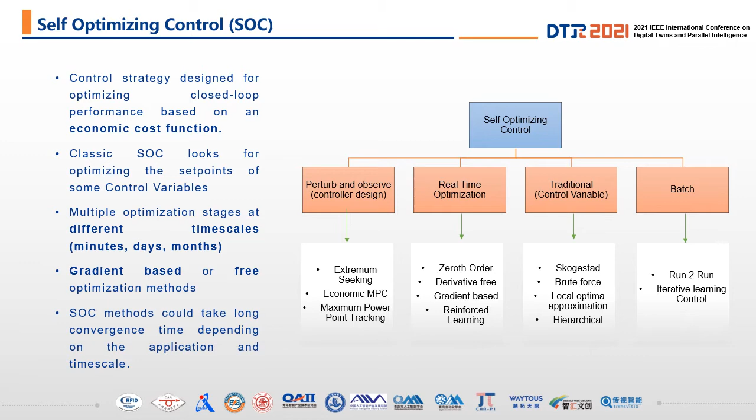So in that sense, if we want to introduce some smartness into the system and combine with this self-optimizing control that indeed requires some modeling of the system, digital twin gives a unique opportunity, considering that the digital twin is a virtual representation of a system. In theory, any system can be virtually represented with a high modeling detail, performing a lot of further analysis like life cycle or closed loop performance analysis, and also interconnecting with IoT and edge computing, and is supported at the same time by breaking technologies like artificial intelligence or machine learning.

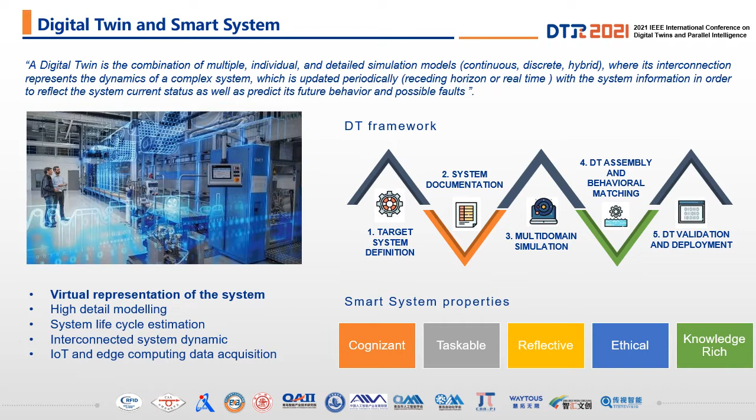So in order to design the digital twin, we can use a framework, in this case for control applications. As we can see here, this framework is composed of 5 steps: target system definition, system documentation, multi-domain simulation, digital twin assembly and behavioral matching, and digital twin validation and deployment. Following that framework, we can design a digital twin that can be used for control applications, and fulfill and introduce some smart system properties like cognizant, taskable, reflective, ethical, and knowledge rich in order to enhance the smartness of the system.

So based on the self-optimizing control strategy plus the digital twin as an enabling technology, let's think about how we can combine this with the parallel control paradigm. In this case, the parallel control is based on the ACP approach: artificial systems, computational experiments, and parallel execution. This framework is initially used to model social cyber physical systems based on some artificial intelligence models, considering that each subject or individual in the society represents one real-time execution agent of those policies.

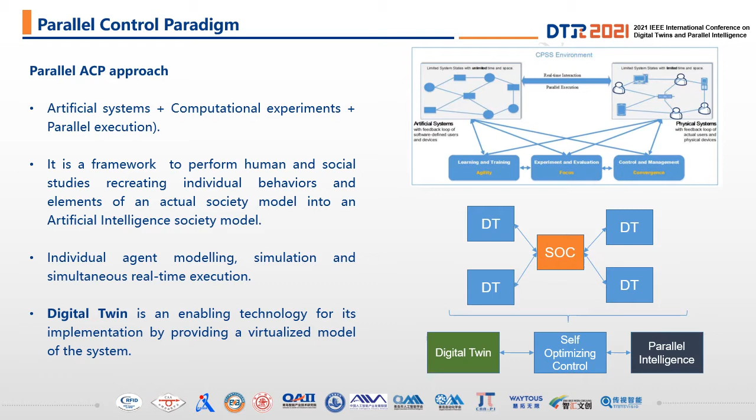So what happens if we replace these individuals by digital twins that replicate the behavior of a complex process, and each digital twin is able to run on different microprocessors? In that sense, we can use different instances of digital twin and combine them through the self-optimizing control in order to enhance the closed loop behavior of the system. That will be the big picture.

So the main goal of this work is to present a parallel self-optimizing control framework that combines those technologies: the digital twin for modeling, the parallel intelligence to support a smart system implementation on multiple instances, and the self-optimizing control through some optimization algorithm that allows the parallel execution, that in this case will be the simultaneous perturbation stochastic approximation algorithm, and in that sense evaluate the virtual world representation interacting directly with the real world or physical asset.

In this case, this framework is going to be tested using a Peltier thermoelectric system in order to analyze the viability of this proposal, and two tests will be performed, with and without the incorporation of parallel intelligence. It means using multiple digital twins and just a regular configuration.

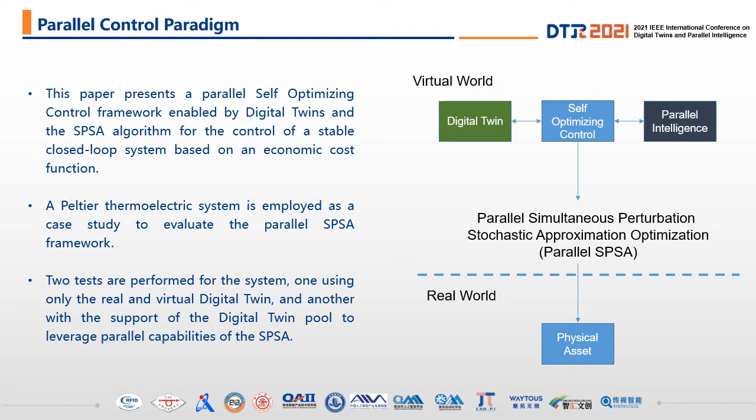Alright, so let's talk about what is the parallel self-optimizing control framework. In this case, the proposed framework for this problem is shown in this figure. As you can see, we have two domains. We have the virtual domain and we have the real domain.

In the real domain, we have the physical system or the asset. In this case, the asset is in a stable closed loop configuration. This is something really important. The system is subject to some disturbances, as well as some control laws, sensor noise, and the plant itself. In this case, the controller will be the element that we are going to change using the real-time self-optimizing controller.

We have the virtual domain also. On the virtual domain, we have a parallel digital twin that is executing at the same time with the real domain, with the physical asset, in order to compare and manage the system performance and evaluate these self-optimizing control possibilities. So in that sense, we can test the self-optimizing control algorithm, in this case using the real domain and also the virtual domain. In addition, we can enhance the performance of this configuration here using a parallel slaves digital twin pool.

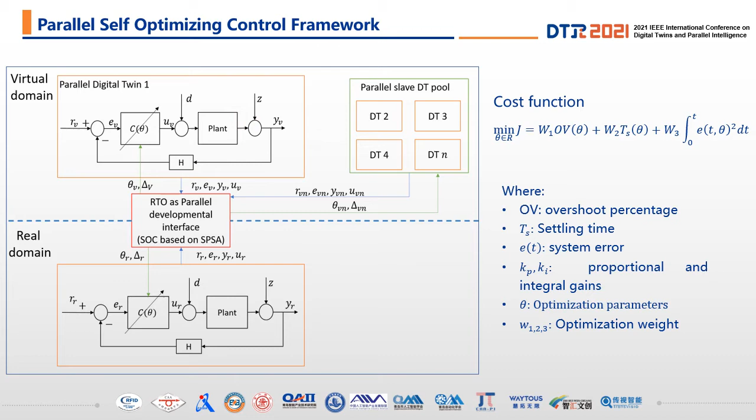So let's talk about the simultaneous perturbation stochastic approximation algorithm. In this case, the SPSA basically is an optimization algorithm that looks to minimize a cost function f in function of x variable using a classic stochastic gradient approximation, as you can see here. The main important thing here is that the approximation of the gradient is a recursive approximation and is performed using some stochastic behavior, as we are going to see here.

This is the approximation for the gradient descent. As you can see here, this is the recursive approximation, like the finite difference. But in this case, we have here ck, we have delta k. This delta k is basically a simultaneous perturbation vector, which is generated in this case by a Bernoulli distribution that is going to change at each optimization step. In this case, the probability of occurrence of this small change ck. That's the main idea of this delta k. And this is going to repeat for all the steps that we are going to execute.

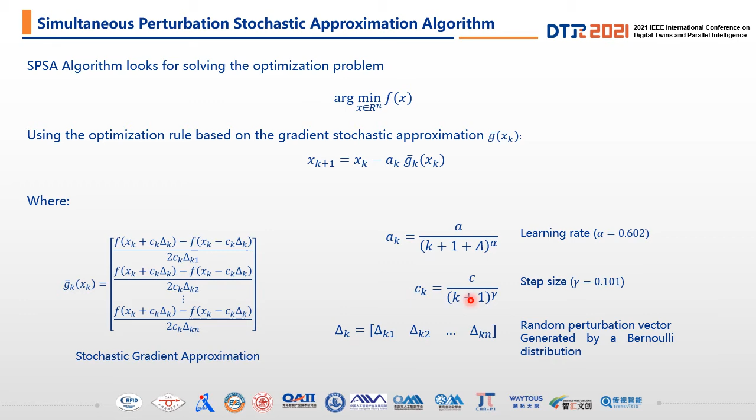So in that sense, we have the basic and parallel SPSA optimization algorithms. The algorithm can be executed in the regular form. Basically, we initialize the algorithm, generate the solutions, generate the simultaneous perturbation vector, in this case just one for each iteration, since we have just one process. We calculate the gradient using this expression here, and we calculate the next step, and we keep updating this for a certain number of iterations, changing each time our perturbation vector.

The main difference, or the algorithm that we want to focus more on in this contribution, is the parallel SPSA. This parallel SPSA follows exactly the same steps. The only difference is that we have multiple instances of the parallel system that in this case are going to be replaced by the digital twin.

Each instance will have its own perturbation vector, and based on its own perturbation vector, we are going to calculate the next step of the optimization based on this expression here, that is basically the consensus regarding the minimum change on the gradient direction on the optimization process following this norm.

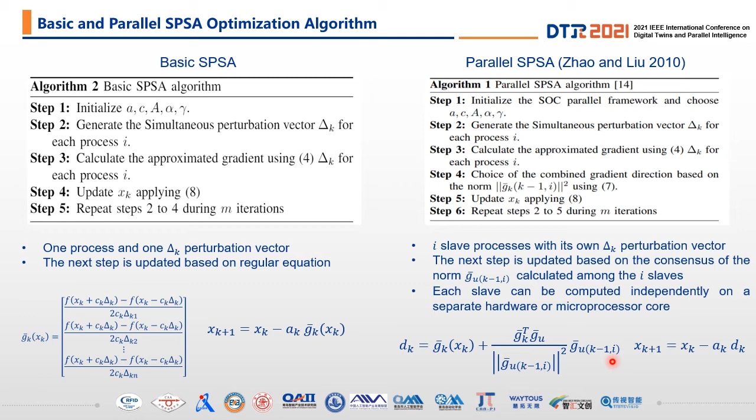So based on this explanation about the framework, let's talk about the case study. In this case, the case study corresponds to a thermal system, as you can see here. This thermal system has this closed-loop execution. We have the thermoelectric element that is going to be a heating element, sensor, actuators, and the control part, working in hardware-in-the-loop execution.

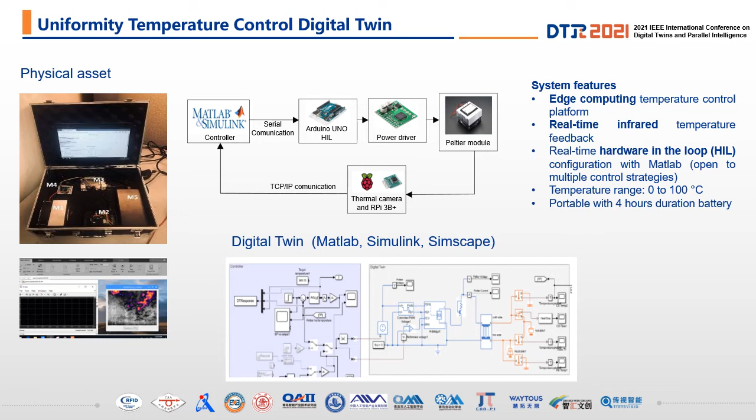For this system, this is the digital twin built in MATLAB, Simulink, and Simscape, representing all these individual elements with a certain amount of detail in order to replicate the behavior of the real system. That's the main idea in this case of the digital twin, following the framework that we showed on the previous slides. In this way, for that system, we are going to execute the framework that we saw in the previous section.

In this framework we are going to use as controller a proportional integral controller. The controller can be changed to any other. In this case, we are going to keep a PI controller. The SPSA is going to be tested with and without the digital twin pool. It means the basic SPSA and the parallel SPSA using 5 different instances for a total of 200 iterations, and with these parameters for the SPSA configuration.

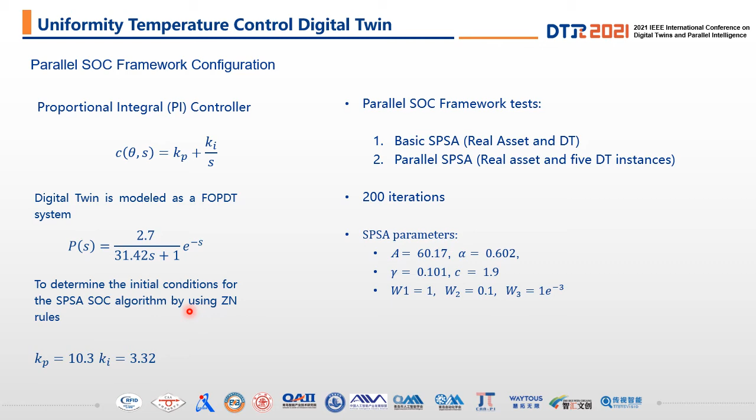The initial condition to start the testing is given by this KP, KI that will be the output of our optimization algorithm. We want to optimize those 2 values. In order to find this initial condition, basically we identify a first order plus dead time model for the digital twin, and based on this first order plus dead time model, we calculate this proportional integral gain based on the Ziegler-Nichols tuning rules, and based on that, the self-optimizing controller should be able to improve the performance.

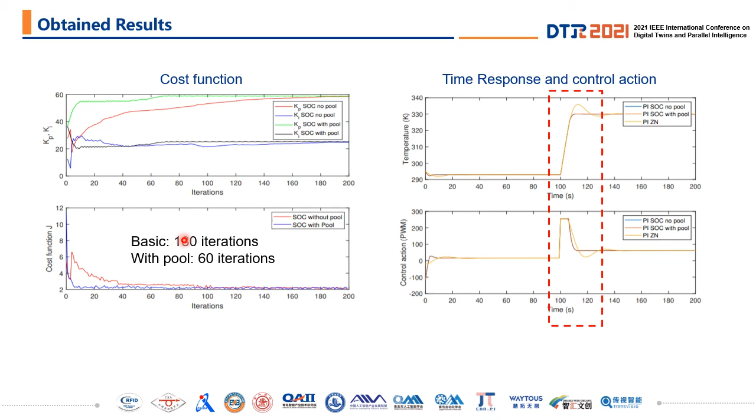So as we can see also here, the response of both systems is really good, as you can see here and also here. Even with this disturbance behavior, we see that the response is really good, and is similar for both optimization cases. The main advantage of this controller is given by the number of iterations. If we use the parallel configuration, we can reduce substantially the time that we use to optimize the system, especially with this system that is pretty slow. Each iteration that you see here takes around 300 seconds to be executed. So this is a substantial reduction in the execution time.

So this work introduced for the very first time this parallel self-optimizing control architecture using the SPSA algorithm, and tested it on this case study of the thermoelectric system. The obtained results show that the SOC framework with the parallel configuration reduces the convergence times of the algorithm and allows finding an optimal response, in this case based on the performance of the system. The parallel self-optimizing framework can be considered as the initial step to introduce more smartness into the loops, supported by parallel intelligence and the digital twin.

So in that sense, the next step is the implementation and validation on a real prototype using hardware-in-the-loop experimentation, and also in problems with more variables, like tens or hundreds of control variables and control parameters. Also, another future work will be to develop a constrained architecture in order to make the system satisfy some optimal desired conditions.